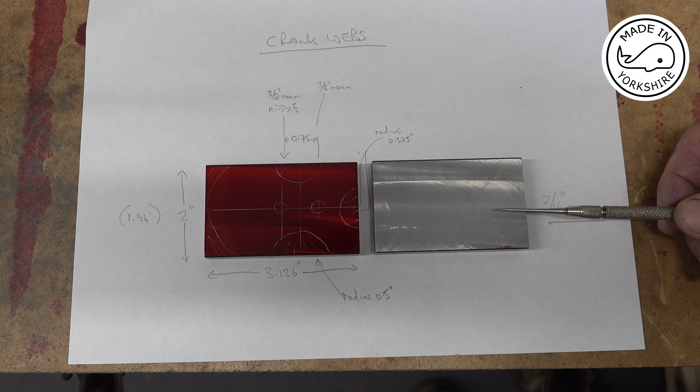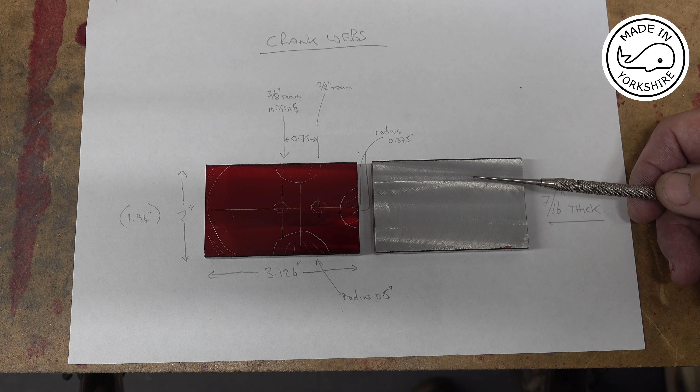So the crank webs are made out of a couple of pieces of mild steel bar, and I got this bar 1 metre long from a company, an eBay seller called Steel2Go. The actual company is B.E. Jenkins Limited in Grantham, and a 1 metre long piece of this, which was 50mm wide by 12mm thick, was only £21.50 including delivery, which I thought was a bargain. I ordered it on the Monday and it arrived on the Tuesday, so you can't go wrong with that.

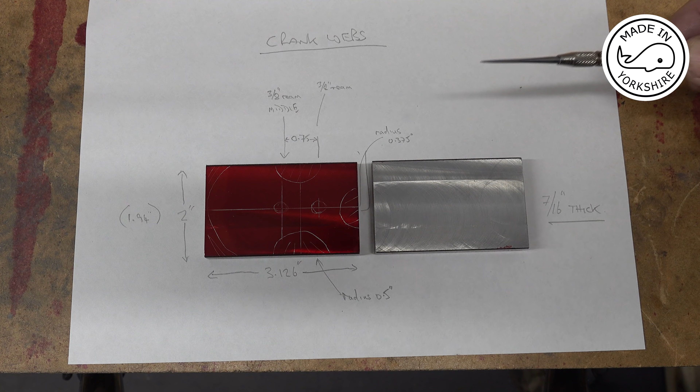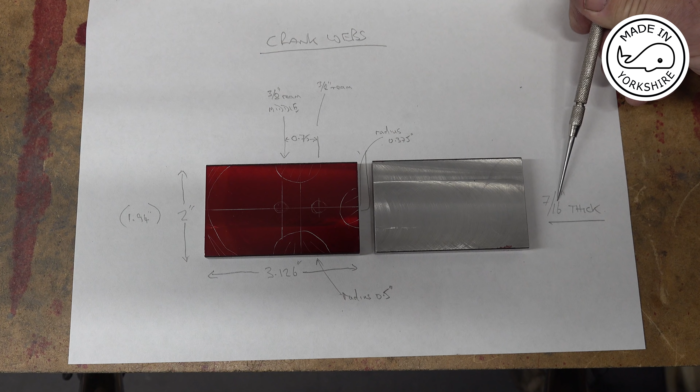But anyway, for the crank webs, this dimension here should be 2 inches. The fact that I've got 50mm, and I've tidied these up, means that I've actually got 1.94 here, but I think we'll be okay. The thickness I've reduced down to 7/16 of an inch, and the width is 3.126 of an inch.

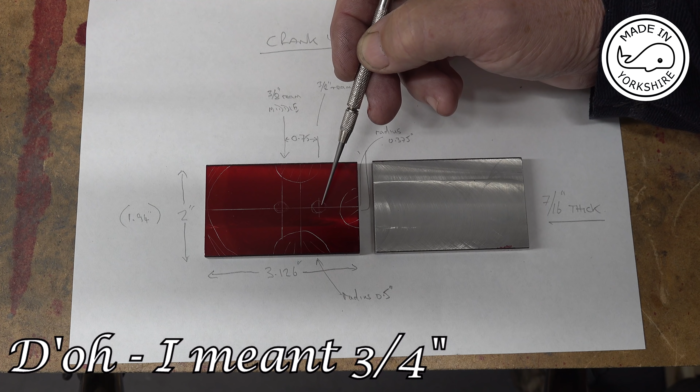So what I need to do first of all, I think, is to centre the piece on the milling machine and drill and ream a 3/8 of an inch hole there. Once I've done that, I'm then going to move down here 3/4 of an inch and drill and ream another 3/8 of an inch hole. Once I've done that, I think I'm going to try and centre back on this hole here on the rotary table and then mill these radiuses here.

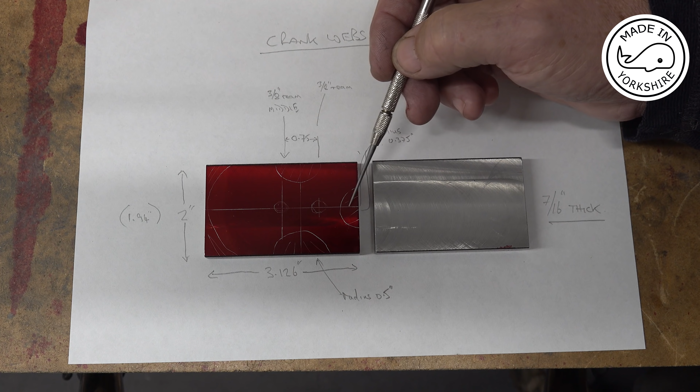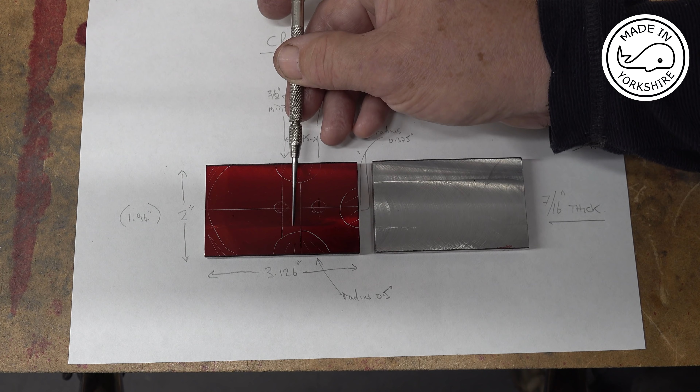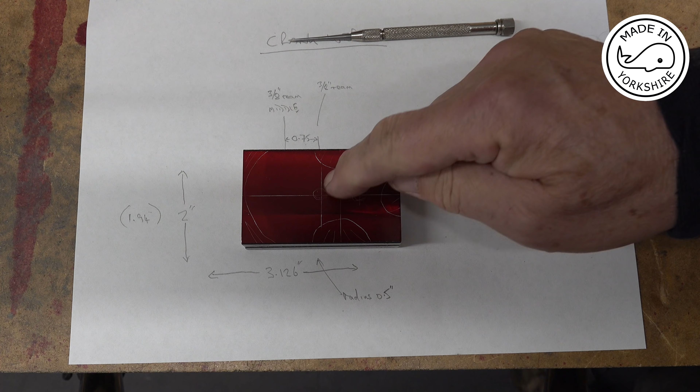Having done that, I'm then going to try and cut these out. And once that machining's been completed, there's a requirement to cut a slot in here and drill and tap a hole for a bolt to go through. So that's the plan, and I think to keep life simple, or simpler maybe, I'm going to super glue these together. And once I've drilled and reamed the hole through there, I think I'll bolt them together. So that's the plan.

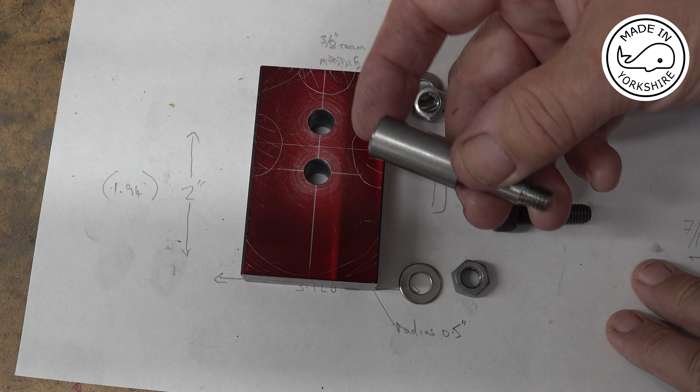So far so good. Now to take these corners off and put a radius on, I think I'm going to try and use the lathe. So to do that I've just made this mandrel, so I can put that through there. Nice tight fit. Bolt it on and then bolt the other hole up to stop any movement. And then I can put that on the collet chuck in the lathe.

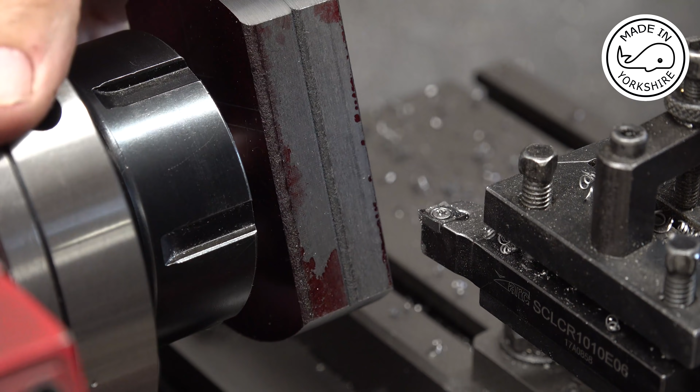This is going to take a while. Well, I've been turning at 200 RPM and cutting in 10 thou increments, and it's taken forever. And these interrupted cuts are quite heavy on the cutter. So this is my last cut now. I'm going to cut 5 thou off. I've put a new cutter in, and hopefully it'll turn out okay. Happy with that.

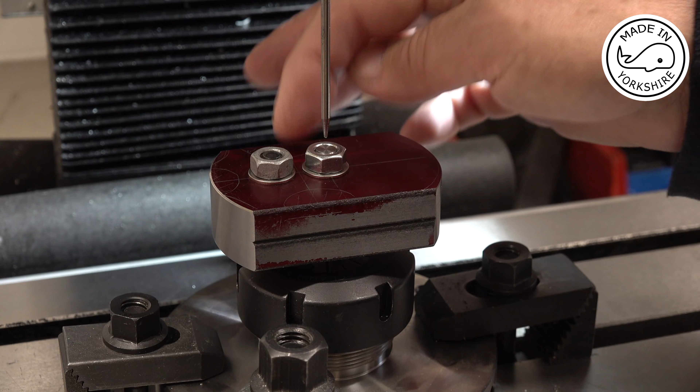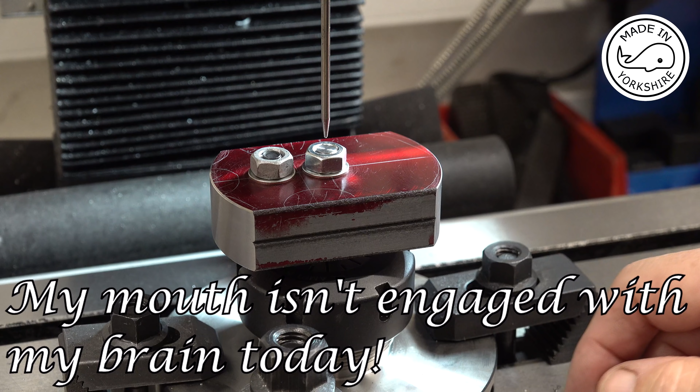Well, in hindsight, I think I'd have been better off machining these half circles before putting the radius on the sides. That way I could have held it in the chuck a lot easier. I can do that one holding it in the chuck, but for these two I've had to resort to this collet chuck, but it feels pretty solid.

I put a bit of round stock in there first of all, and used a coaxial indicator to centre on it, and just as a double check, that looks pretty spot on to me. So I'll reposition the table and start drilling this semicircle. I think the radius on this is 1/2 inch.

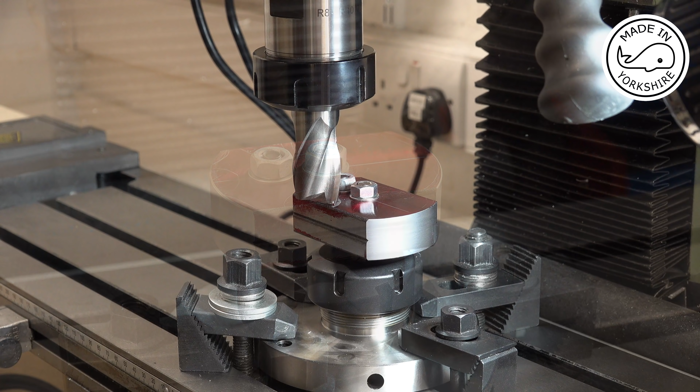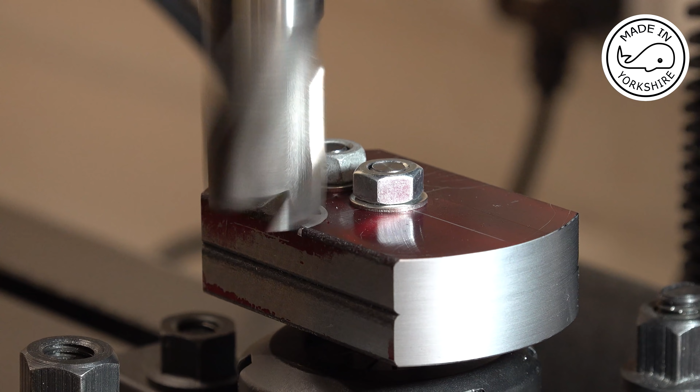Well, for the purposes of the camera, I'll have a go at machining this one first of all, and this is an ER40 collet chuck holding this 1 inch diameter cutter. I suppose another option would be to use a boring head. You never know, I might have to resort to that, but we'll see how I get on. Don't like that. Try locking the column, see if that helps.

Okay, so I've had a bit of a rethink. I've moved the table that way, and I'm going to start nibbling away using this 1 inch diameter cutter. Well, this seems to be working, so I'll continue cutting downwards, and once I've completed that cut, I move the table back out again, do another cut, and then gradually move it to the original position. So that's the plan. I'll get back to you once I'm a bit closer to finishing.

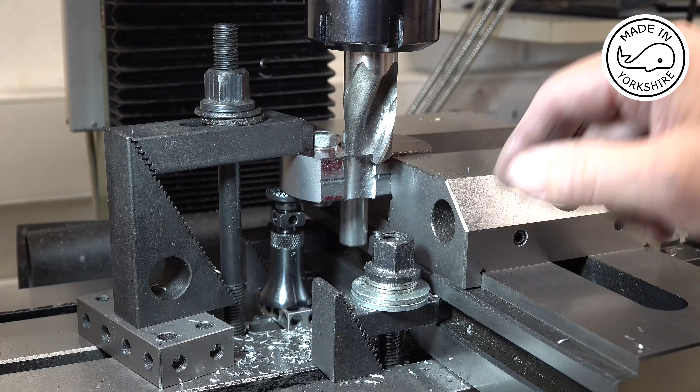Well, that was sort of going okay, but then the part moved very slightly and the spindle locked. So I'm going to have to rethink how I hold this part. Okay, so this is plan B, and I could kick myself for not doing these before turning these sides, but anyway, you live and learn.

So I've got the vise all nice and square, nicely bolted down, got some parallels in here. I've rested the part on the parallels. I've got a little mini jack here which is supporting this end, and I'm clamping this end down as well. So everything feels nice and rock solid, and I'm cutting at about 40 thou at a time on the y-axis, and it seems to be going okay.

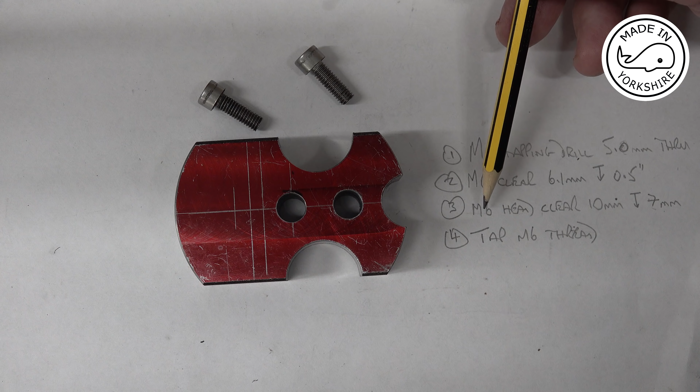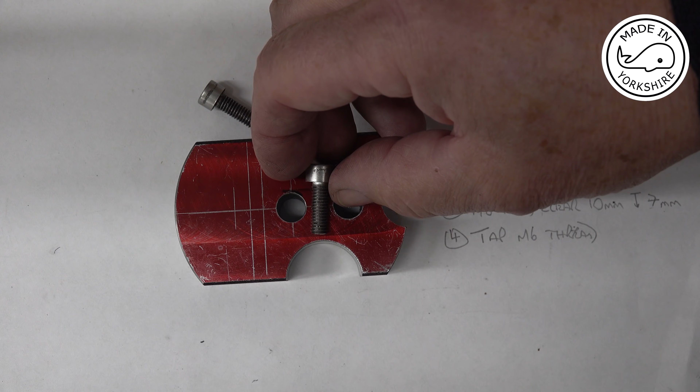Then M6 clear, so 6.1mm to a depth of 1/2 inch, taking me down to that point roughly. Then I need the head clearance, so that's 10mm to a depth of 7mm there. And then lastly I just need to tap the lower bit to M6 thread, so it can take bolts like that. And they're drilled in the centre position there on each of these pieces.

Okay, so I've positioned the x-axis on this centre line here. Then I found the centre of the two pieces and moved the y-axis that way, 0.22 of an inch and centre drilled, and then moved it this way another 0.22 of an inch, 0.44 of an inch to drill the other hole, or to centre drill. So this is just basic drilling and tapping, so I'll do most of it off camera.

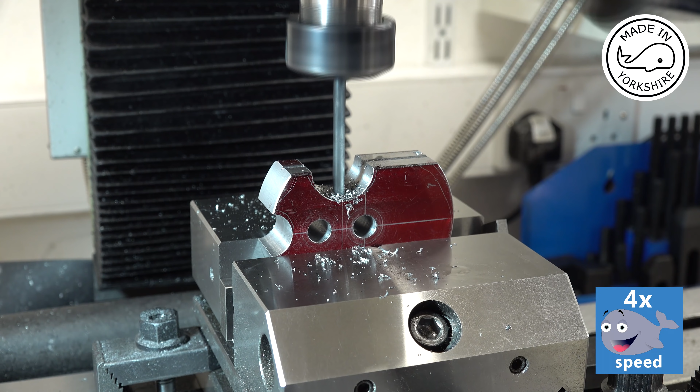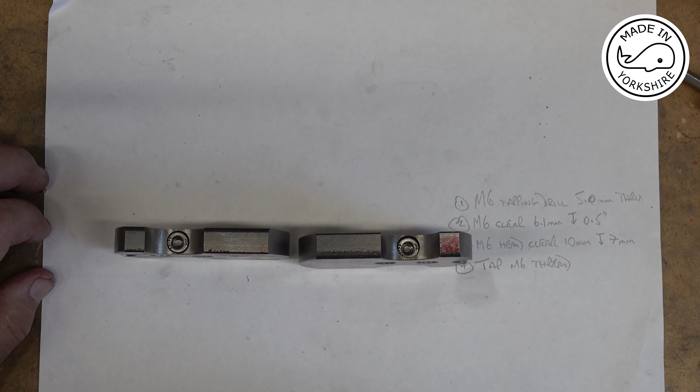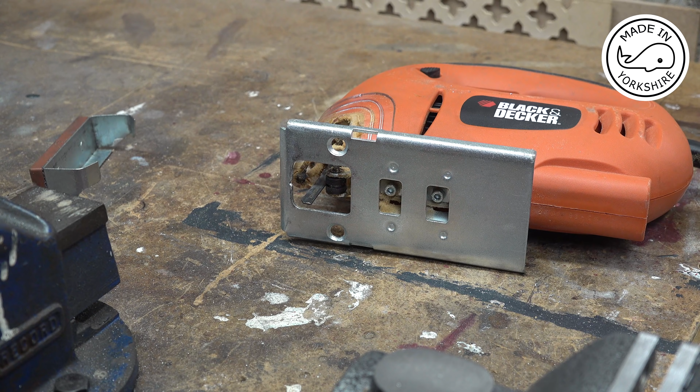Well, they seem to turn out okay. Pretty close to the edges, but I got away with it. So all I need to do now is to cut some slots in here. Not too sure how to do that. Well, I think it might be my lucky day. I've just found a metal cutting saw for my old jigsaw. I'll have to give that a try.

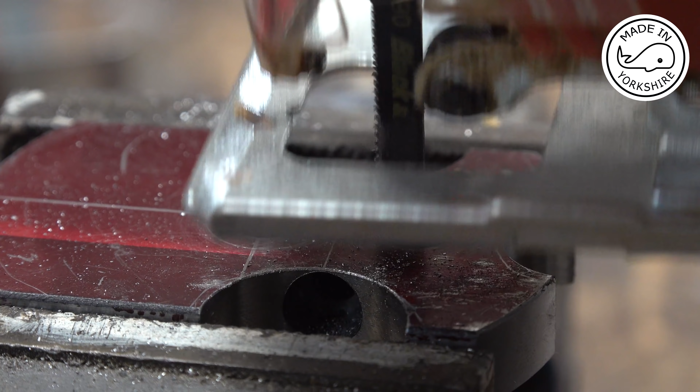Blimey. Well, I've just roughly cut a piece of silver steel, which is about 4/10 of a thou over 3/8 of an inch, and you need to tighten these really tight, but it seems to have got it. So fingers crossed it will work in real life. Don't look bad actually.

Well, some of you might recall that when I made the cam housing in my last video, I struggled to find any oilite bushes. But I've had a bit more of a search around the internet, and I found a couple of companies that do them in the UK, Simply Bearings and Bearing Boys. And I've actually bought one from Simply Bearings for the front, and works a treat. I'm really happy with it. And I've also made this timing cover as well.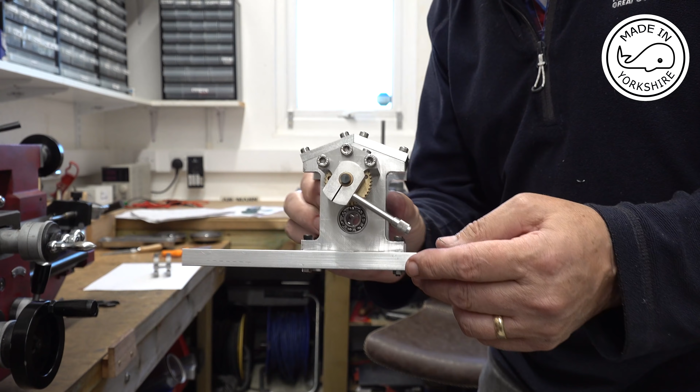Now, in terms of the crank webs, I suppose I'm yet to be convinced that this method is going to work. But I think if I use silver steel that's oversized slightly, I might get away with it. But my next problem I've got is the actual flywheels, and I've been searching around for some bronze, and I can't really find any that's a decent price. In fact, I'm struggling finding something that's not a silly price.

And I saw a posting, I think from Jason B, that he suggested that you can get bronze, cast bronze, in a sort of like tube format. And I've looked around for that as well. I just can't find any. And I found some in the States, and that's going to cost between 150 and 200 quid, and there's no way I'm going to pay that. So I'm just wondering about alternatives. I think brass would be a similar sort of price, and I think it's a bit lighter.

So what I'm thinking of is buying some cast iron chuck adapter blanks, which you can get for about 25 quid each. And if I machine those to size and finish them, give them a really nice polish up, like I've done on my other engines, that might be an alternative solution. They won't look as spectacular, but I think it'll be functional. But anyway, if anybody has any thoughts on where I can get some decent bronze at a decent price, I'd really appreciate it.